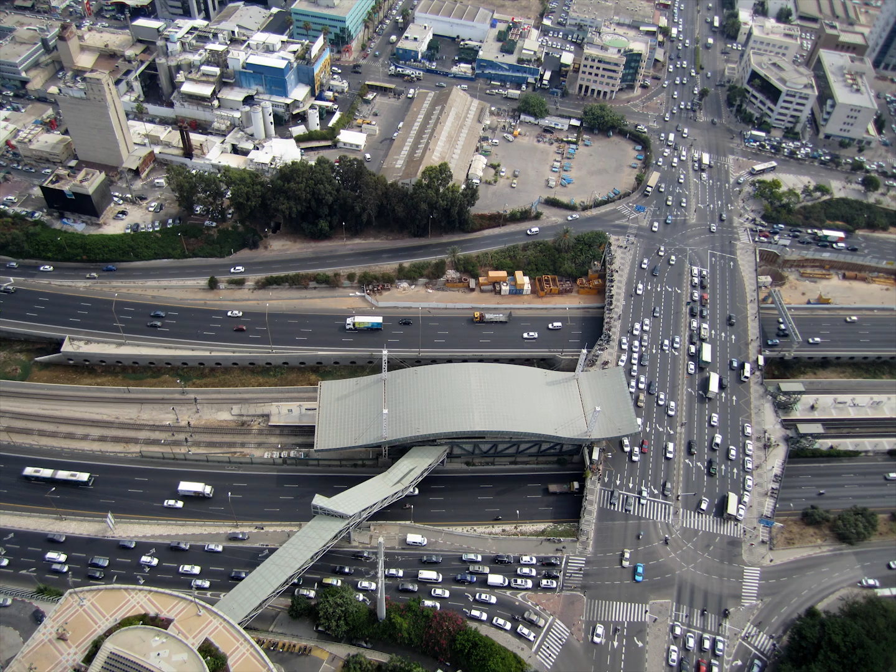When localness provides identity, this urban project offers a new vision to a place which has been run over, literally, by the Ayalon Highway. A highly potential urban site has turned into a deserted asphalt wasteland—a scar in the urban tissue, a physical border between two cities, a place that turned into a non-place.

Ayalon Highway is the spinal cord of the Tel Aviv metropolitan traffic system. Historically, the industrial zones of Tel Aviv and Ramat Gan have been located along the Ayalon, which turns the Ayalon stream into the backyard of the cities.

How can we turn the disadvantage into an advantage? How can we keep the qualities of the highway? How can the Ayalon Highway turn into a public open space, a site of urban interest, a residential alternative, and at the same time stay a highway?

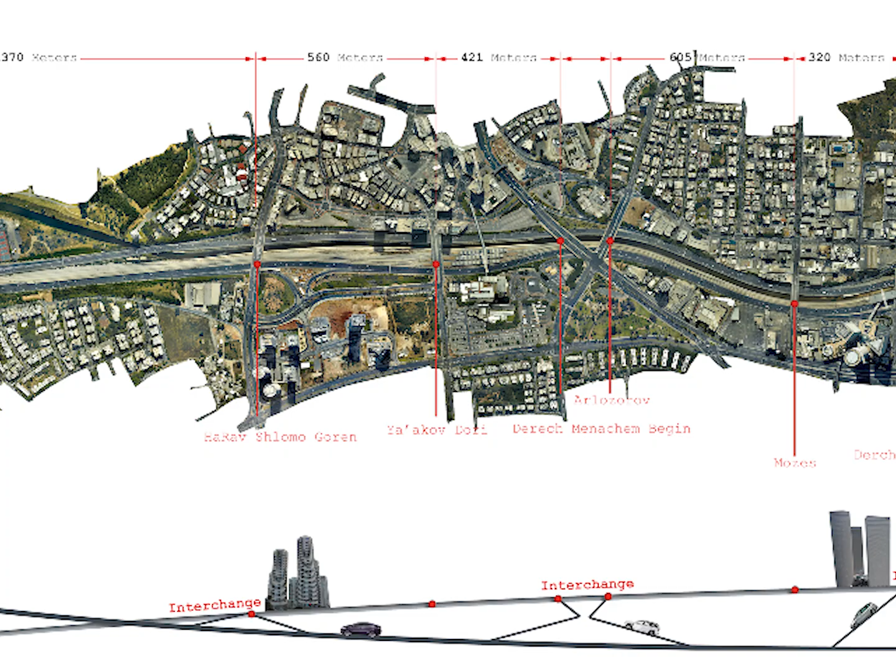Typical existing section: a plan and sectional diagram of the Ayalon Highway and its relation to the city's ground level. When the highway enters the city, it descends below the city's ground level. Preliminary sketch: today, to reach the city from the Ayalon Highway, you have to ascend.

The project's action is simple. Instead of ascending, you descend from the Ayalon Highway to the city's ground level. A space is created beneath the highway, the banks and the stream are freed, and the Ayalon Highway is recreated.

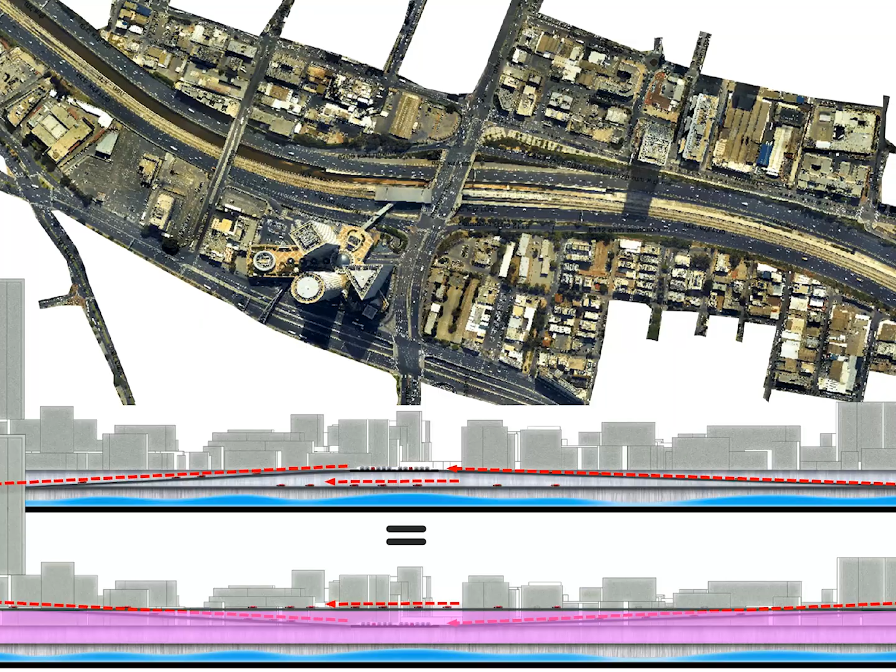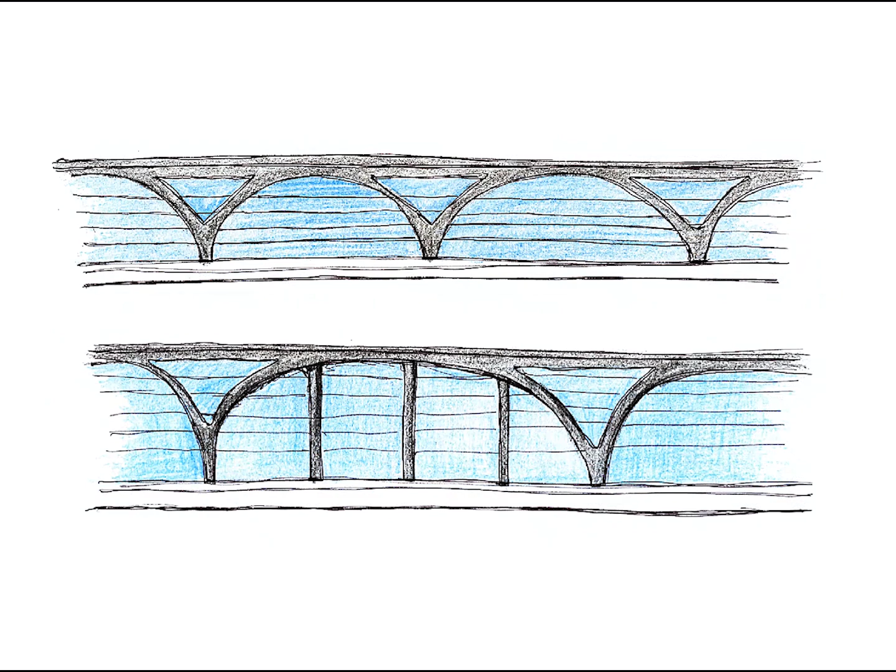The construction is a vital part of this project. Three types of construction were considered: the first was the typical column and beam construction, the second was the arc construction, and the third was the suspended construction—examined using a 500-meter non-contextual segment.

30-meter span columns, with a minimal static height of beams, creating spaces and volumes beneath.

60-meter span columns, where the static height of the beam grows, creating spaces and volumes beneath.

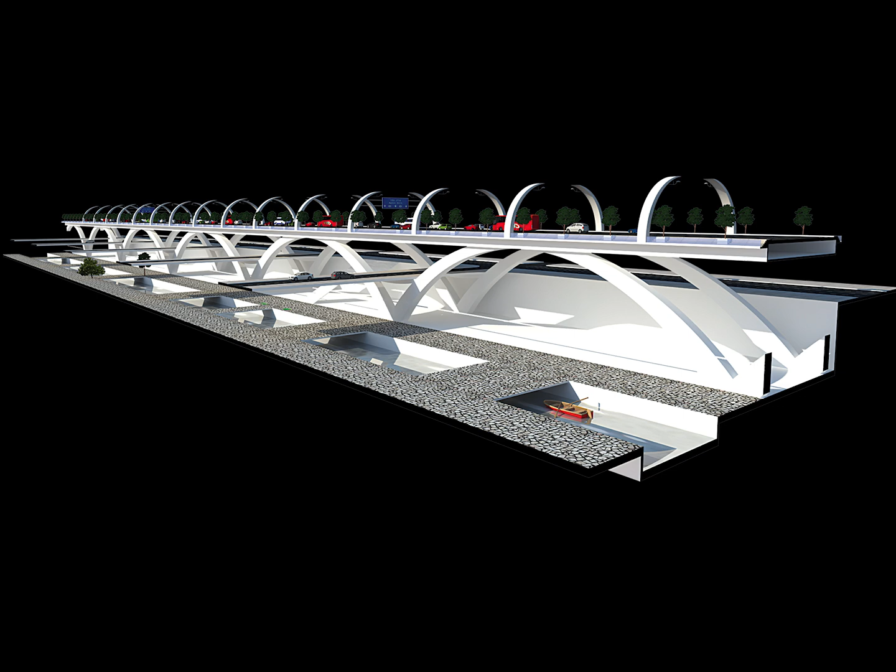Arc construction creates spaces and volumes beneath. An arc construction alternative and a suspended construction both create spaces and volumes beneath.

Back to the urban context: to examine the project in context, the segment was chosen between Azrieli Center and Yitzhak Sadeh Bridge.

This is an urban planning project that puts emphasis on the potential of the suggested section, with neighborhoods along the project boundaries, new streets connecting east to west, a new street along the west bank of the Ayalon stream, and a pedestrian mall continuing the Yehudit Boulevard.

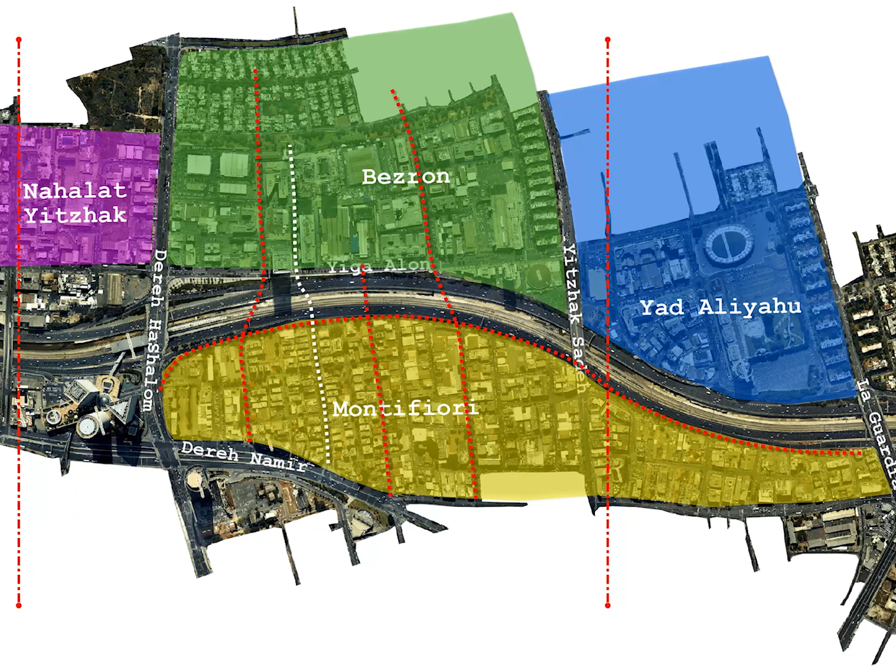Distances between east-west connections, and an urban suggestion land use plan for the selected segment. The goal is to mix land use and functions.

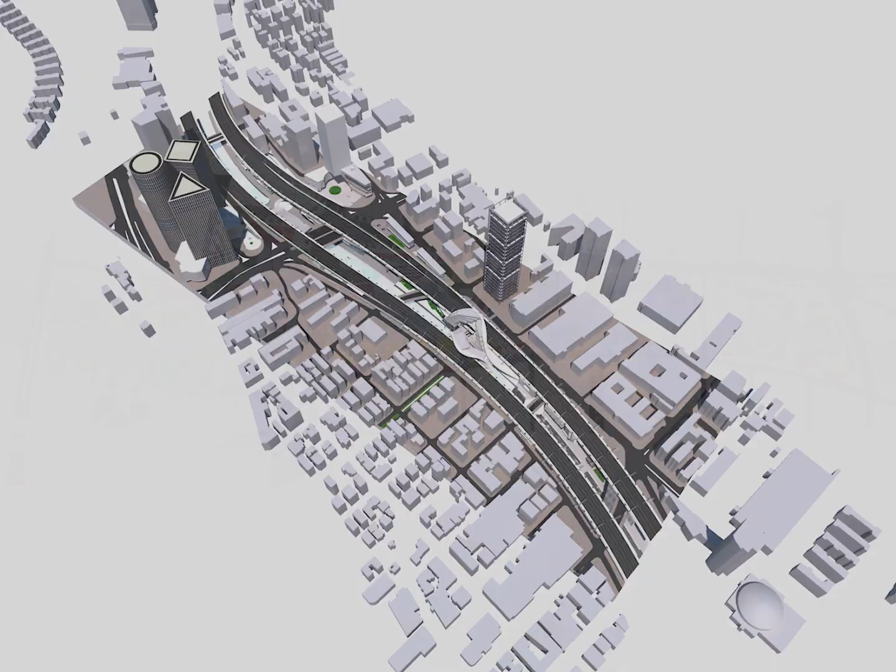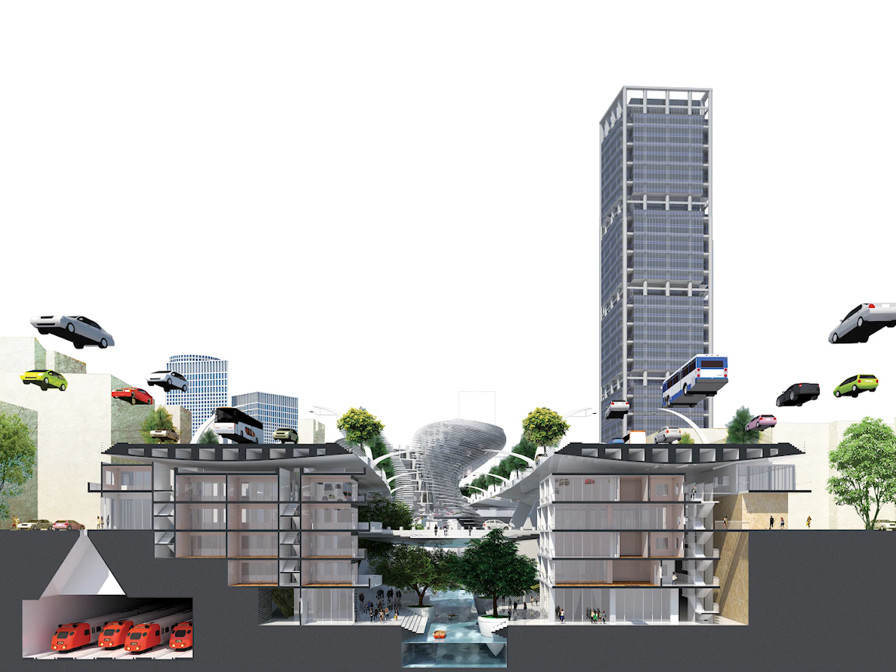Let's look at some different situations in the selected segment. The first section is through the residential area, with different residential typologies that fit this section—for example, a plan for four apartments accessed from street level through a commercial front.

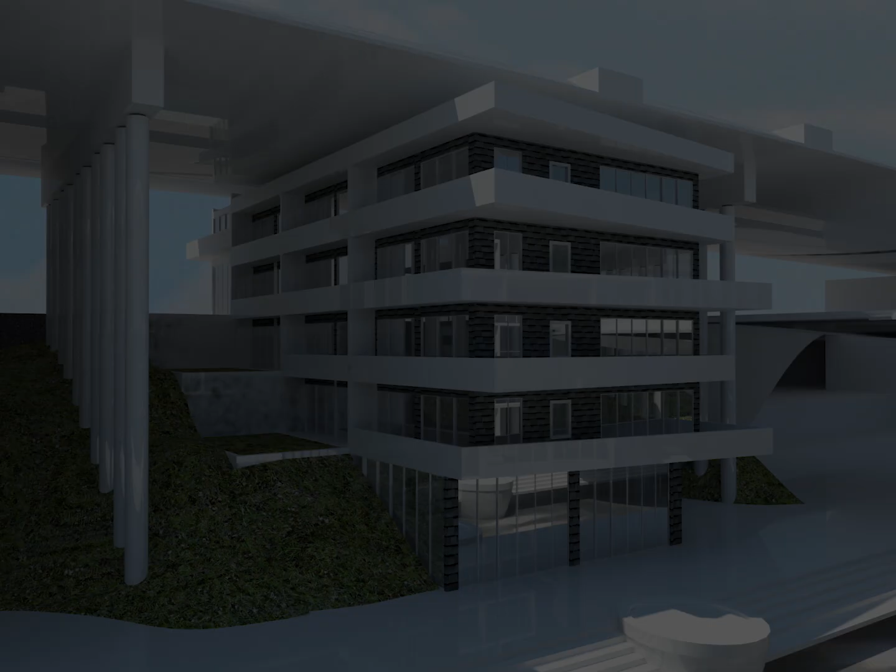Another option for the residential building on the west bank includes three apartments and a commercial unit on the ground floor. And another alternative is also shown.

The second section is through a public building that bridges over the stream and creates a public focal point.

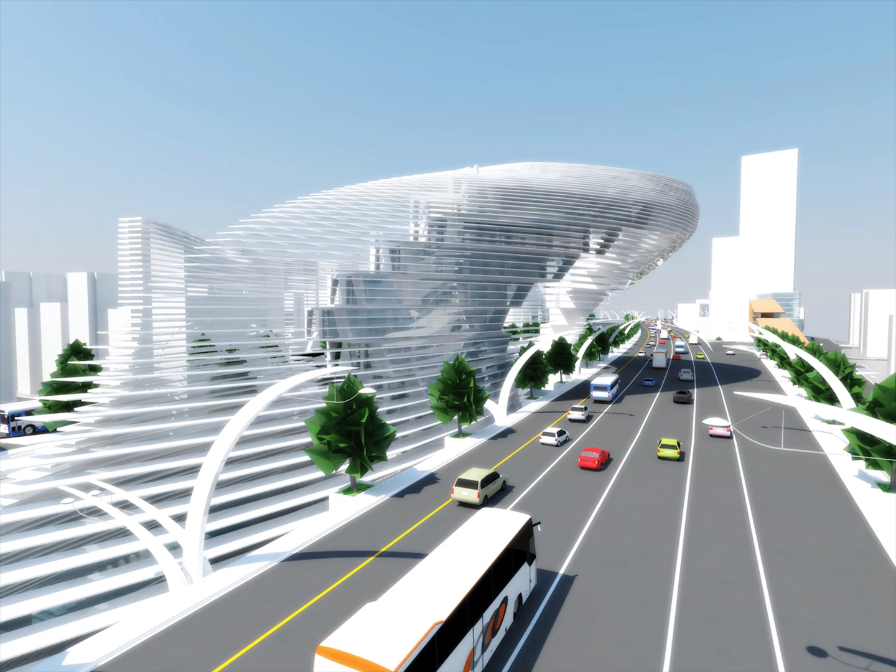The third section is through a car parking building that provides a solution to the traffic needs of the area.

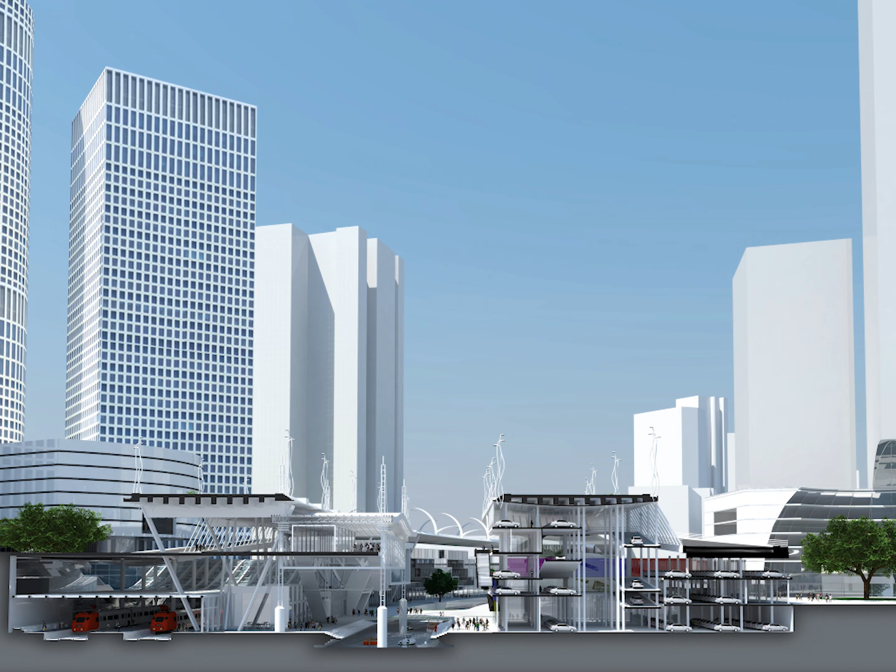The fourth section is through a new open public space that connects the new train station with the new building on the east bank and the Azrieli Center.